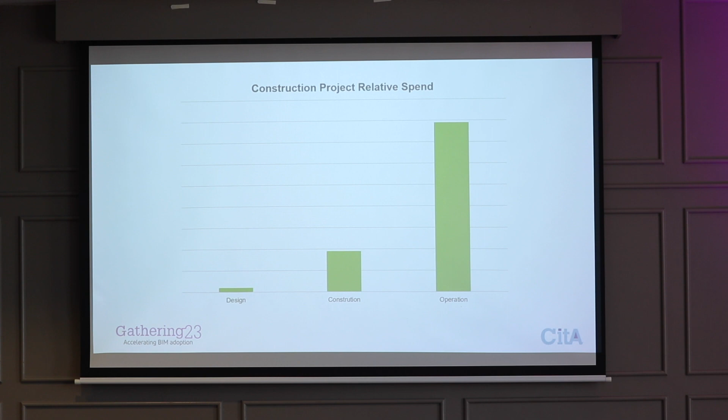I think we all know design is a very small part of the overall construction project, which is a very small part of the overall operation. I think the point I'd like to make is that if we invest in design, we can reduce that construction cost and reduce that operation. But that investment needs to be for the right thing and for the right reason.

We all know we need to make better decisions earlier on in projects. The only way we're going to do that is by making better design decisions earlier on, and having the ability and the resources, the infrastructure and the tools to get the right data at the right time, to make the right decision for the betterment of the project, to reduce construction cost, reduce waste, reduce construction operation, and reduce the carbon output of our projects.

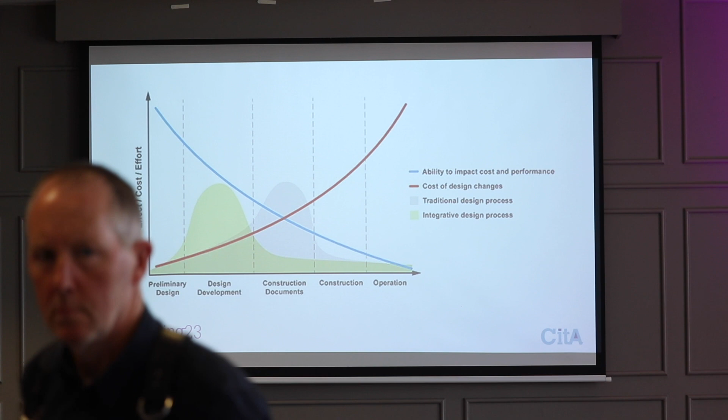It's about maybe changing our fee structures and our cash flowing to make sure we're spending the right time at the right point in projects so we can get the right decisions made.

Where we've seen this work best on projects is when there's been standards, we've agreed to the standards, and we've all worked and cooperated and communicated together. We've come together as a team, and the team has delivered project outcomes. The reverse is true - where this generally fails is when there's been a fall down in a standard, or a fall down in communication and cooperation. For me, it's about trying to get the construction industry and the operation industry and all of us together to foster a better environment and an agreed way that we can get this stuff done.

As Pat has outlined, maybe there is a way more efficient way to deliver these projects.

A term I really like in the ISO 19650 suite of documents is the level of information need. For me, it really focuses the question of why are we doing this, what's our purpose, why are we doing this project. It's not a BIM question, it's not a technology question, it's what do we need to get from this project. What can digital, what can BIM, what can all our lean processes do, and what do we need to do to meet that need?

Information being a big part of it - what do I need, what does the client need at the end of this project? If we answer that, we start from the end and work back and figure out, as a team of designers and construction professionals, what we need to deliver the client during and after the project. So a real lot of time for me spent answering this question earlier on the project will reap huge benefits to the project and its outcomes.

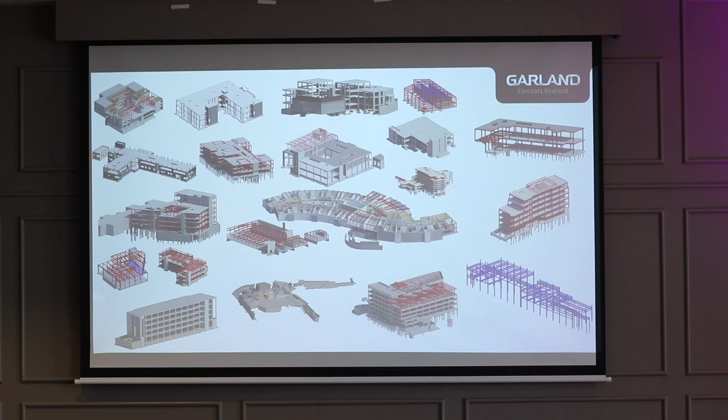It's with those connections and interoperabilities that will make things better for all of us, so that we are working smarter and leaner. We've learned an awful lot of lessons, and we've made an awful lot of mistakes. We try our best to learn from them, and I'll show you a couple of examples of how we think we've tried to make things better in our practice, and how we still haven't succeeded.

This is one of our first BIM projects. It's over 10 years old now, which is hard to believe. It was a design build contract, and I think that really helped foster the communication, cooperation, and agreement to standards that we needed to deliver our first project.

It was design build. We were working for BAM, and BAM said to us, we want to do this in BIM. There was no client requirement and no client need, but we want to do this with BIM. I think everyone went into the project and said, we don't know all these answers. As a team, as a group of professionals, we're going to figure out these answers as we go, and we'll all learn from each other and help each other. It was that environment that I think helped us learn a huge amount that we still bring to the fore on some of our current projects.

It really opened my eyes to how powerful a common data environment can be, and how powerful a naming convention can be. There's nothing better than going to a common data environment, knowing you need something, and getting it straight away, at least with a couple of clicks.

Nothing is more frustrating than going to the common data environment and not being able to find what you need, or the version you've got isn't there, and you need to start going on the phone and sending emails to find out what you need. There's a huge amount of value in having a proper common data environment working on a project. I think this project really reinforced that for us.

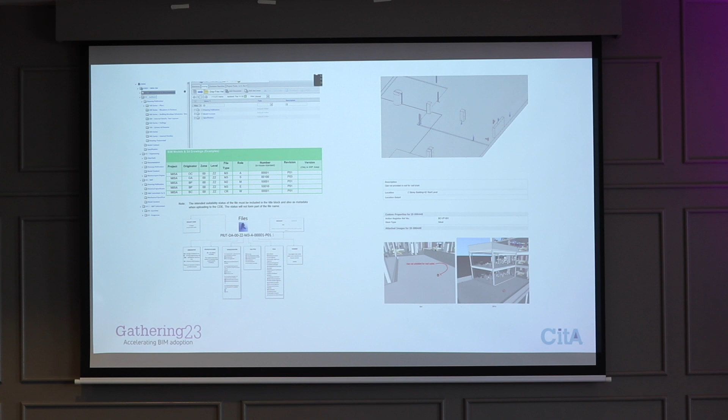Clash detection, clash avoidance, whatever you need. Again, 3D visualization 10 years ago really blew our minds for what was possible for the industry, and as Pat has shown us, what we can now deliver to our clients. You tell us your building, you tell us your bathroom, you tell us that, and we'll deliver it.

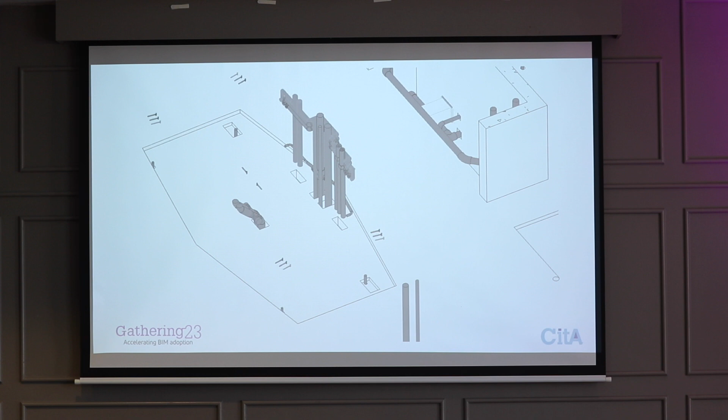Really what we instilled with this project and others is respecting the content. If we don't have the content right, things aren't going to work, and we're not going to be able to connect things.

A small example here - for those structural engineers in the room, I'll call it respect the node. We had a misalignment of the node, so the node wasn't where it was meant to be in the structural model, but it was in the physical model. That started throwing up all sorts of errors, and when you have one of these it's fine, but when your error log says 500 errors, that's off-putting immediately, and someone says, it doesn't work, the technology's not working for me, I'm going back to the way I used to do it.

So, respecting the content - I'll touch on it again. I think there's been a theme over the past morning already, and in some of the sessions I was able to witness over the last two days, in trying to keep it simple.

And the simpler we make things, the more efficient it's becoming for ourselves. Trying not to overcomplicate it, and trying to model, manufacture, and build in the most efficient and simple way possible has to be our future.

I think maybe we've gone through a peak and a trough. The theme I'm trying to pick up is that simple is best at the moment, because we tried to overcomplicate it since we have the technology to do it. But actually we need to think, what are we trying to do? What's the level of information we need? What's the outcome we need? And how can we make the technology give us that answer or that outcome?

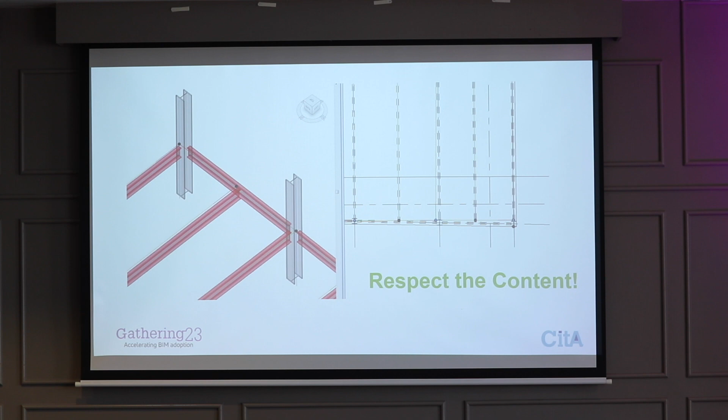I suppose that was one of our first structural projects, one of our first kind of civil projects where we tried to implement technologies. It's an economic free zone in Saudi Arabia. Like most projects in Saudi, it hasn't actually got built. They've thrown out everything and they're re-going at it again, so I'm delighted to be working on it again. That kind of rework we like, because we get the fee twice.

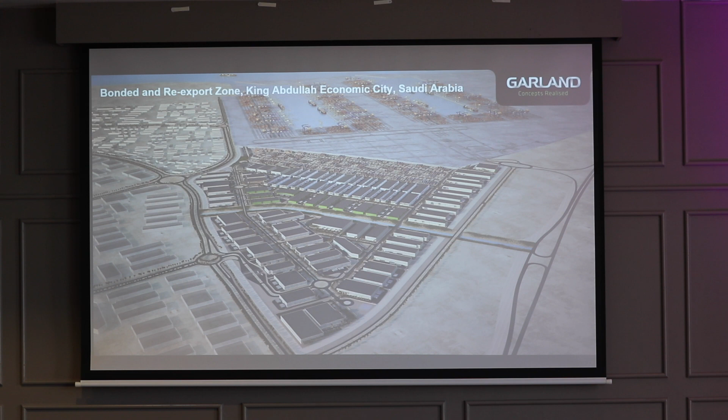What we were dealing with, it's a 320 hectare site. So although it looks simple, there was an awful lot of data and a huge amount of information. And we really learned quickly that our current processes and our original processes for trying to manage that size of site and that sort of information was just impossible, and we couldn't do it.

We needed to figure out a way that we could work with and change our processes so the information was workable and usable. So we had to come up with our own internal naming system. We learned a lot from the previous project on the structural side, trying to break down our work so we weren't loading 500 megabyte models or drawings. We were loading 3 or 4 megabyte drawings, with lots of links going on. We tried to make it as efficient as we could so people could work independently of each other. We learned an awful lot from the Civil 3D side on trying to make that project efficient for ourselves.

But then the client came along and told us, oh yeah, it's all fine, but we can't accept that file the way you have it with all those data shortcuts and XREFs. We want one AutoCAD drawing with everything blocked in and built into it. We spent an awful lot of time with the client trying to convince them of how they could work with our stuff, how the way we'd set it up would work, and they could accept our model, with object enablers and so on. We didn't win the battle.

So what happened in reality was we had a data dump every Friday. We were actually working on the design of the project Monday and Tuesday, and we spent Wednesday, Thursday, and Friday getting the delivery ready for the client. For me, that's a huge amount of waste. We were wasting the time we should have been spending on getting a better design, optimizing our design, instead of just getting a deliverable ready.

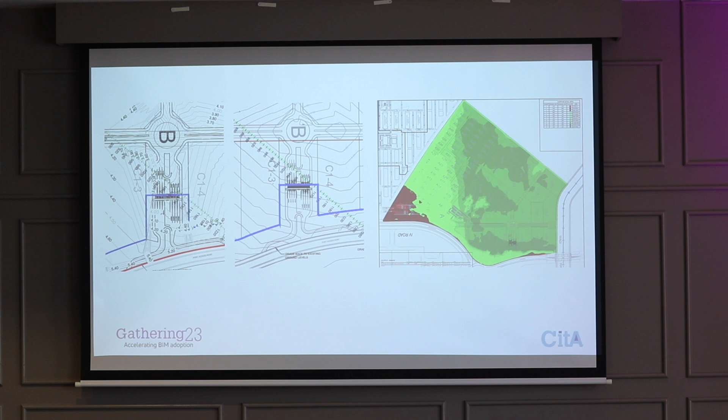And we simplified the model. And when we simplified the model, everything worked better. And we got an answer that we could trust, and we knew there wasn't errors, and that was essential for delivering for the type of client that we had.

Another type of example or discussion I hear in the office all the time is, I need a better computer. My graphics card isn't good enough. My processor isn't good enough. So we were opening up these models in Civil 3D, and again, it's a 320 hectare site, so it's a big area on an AutoCAD drawing.

And they were loading all the XREFs, loading all the data shortcuts. And it was taking 10, 15, 20 minutes for the drawing to open for someone. And my computer's broken, my computer's not working.

So eventually we said, right, put the pause button. After a few weeks of listening to this, hit the pause button. What's going on? What is it loading? And eventually we got to the bottom of it, that we had this bloated XREF, as I call it.

Our background that we were working with had actually 15 backgrounds on top of each other. They had dummy lines, loads of blocks that were loading that were not necessary. We spent a lot of time just cleaning up our background, which in hindsight sounds really simple, but when you're in the middle of the throes of it, it can really annoy you.

Cleaned it up. Instead of loading for 15 minutes, it was loading for 3 minutes. And the file size went from 100 megabytes down to 5. And you got to remember, every Friday we're giving this thing to the client 1,000 times because he wants an individual file with all the XREFs in. We were giving this client that file, and our CDE was just exploding. And then overnight, our CDE just disappeared in file size because we brought down the size of this file.

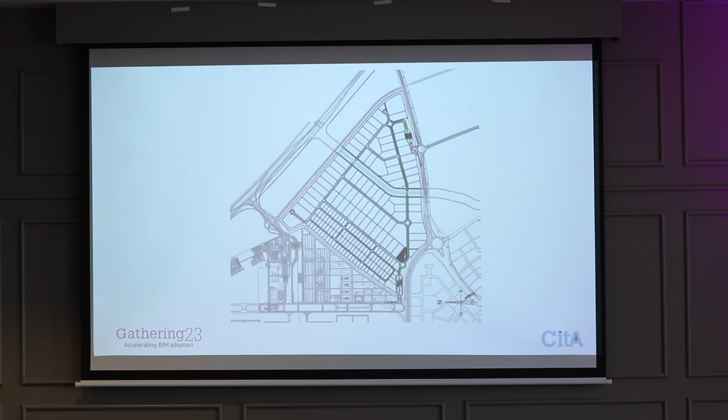But again, just the waste of the data storage, the waste of the minutes of loading, they're the things we just need to work on. And it does take us at least a minute to hang on. There has to be a better way. There's something wrong. Let's go and find it and fix it.

And the other thing to remember as well is, as a practice, we deliver big projects in history over time. We've done it consistently. Shannon Industrial Estate was a 500-hectare development, 50 kilometres of road. We did it manually, drawing by hand on drawing boards. Thankfully, I wasn't there for that one.

But the way we were able to do it was because we kept it simple. We had some simple rules. There were areas of, this is where the sewers are going on the road, this is where the ducts are going on the road, this is going on the footpath. We didn't need to clash detect. And again, there are things that we learned in our bonded zone project where we said, right, if we do this and we keep these simple rules, we only need to clash detect these 4 or 5 things.

We don't need to model a 320 hectare site. We just model these 5 areas in 3D, because if there's going to be a clash, that's where it's going to be. Same with Raheen, 180 hectares. We were able to deliver these projects in the past without technology, so the challenge now is figuring out how to use technology to deliver them more efficiently, without overcomplicating things.

So what's my message? There's always a better way, usually. And I always think of my friend on the typewriter. Keeping it simple, stupid, is a motto I have throughout our office and organization. If we're not keeping it simple, we're losing.

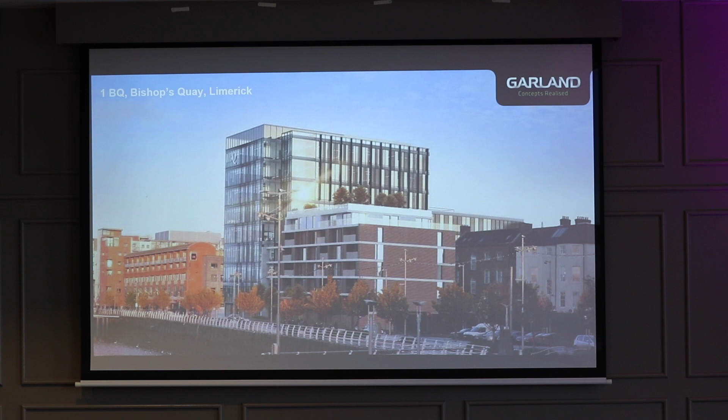We've tried to apply this on our ongoing projects. Sometimes we succeed, sometimes we don't. One project on the screen - I won't name it, I might get in trouble - we were being screamed at for RC schedules, reinforced concrete bar bending schedules for the building. Screamed at, and screamed at: we need them, we need them, we need them.

Then 3 weeks later, the person requesting it turned around and said, actually, we're going to prefabricate all the reinforcement - this fellow here is going to prefabricate it all in the office - and they want this, this, and this instead. They're throwing out your schedules. So we spent 5 weeks delivering these RC schedules and they were dumped in the bin. Not only that, we had to change the way we did it to suit someone else's methodology. To me, that's as much waste as the bricks in the skip, and I think that's where we need to focus as well.

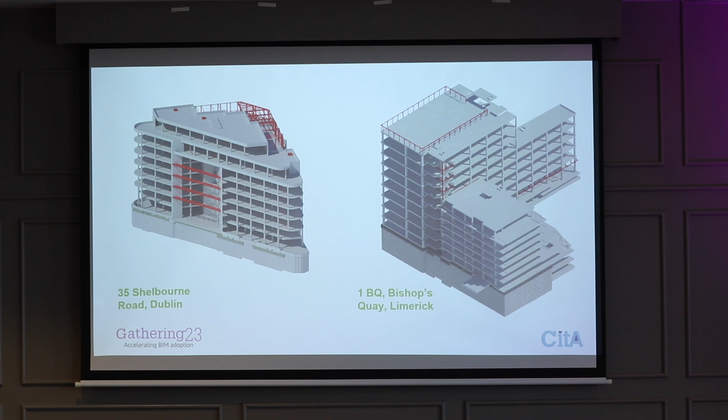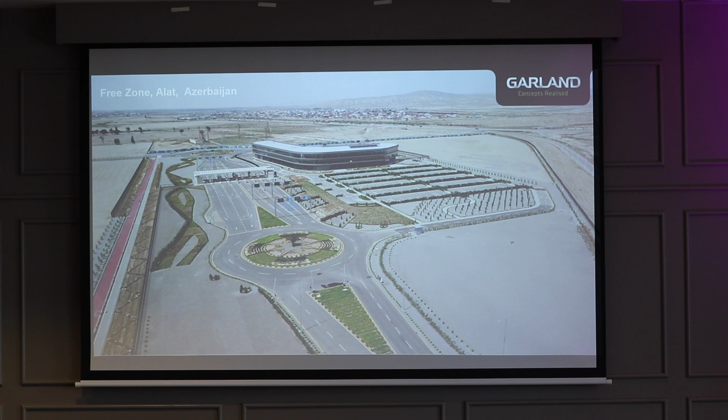Again, the learnings we had from the bonded zone, we were able to bring to a project in Azerbaijan. Did we make mistakes? Did we learn lessons? We're still learning them, we're still making them, but I think we're getting there. From that, we were actually asked to write a roadmap for the implementation of BIM in Azerbaijan. I can't leave it on the screen too long because they haven't published it yet - hopefully we get there soon, because we'll need to rework it with the dates if they don't move quick enough.

Getting back to the theme of connecting things - we're trying to look internally at how we set ourselves up, because we're going to be faced with challenges. There's one job where we were asked to design a feature stairs for a fit-out project. I spent more time dealing with 2 different CDEs and a 3rd inspection plan - training, uploading, re-revisioning for those - than I did actually designing the steel for the feature stairs. I think maybe we've lost sight of what the purpose of what we're trying to do is, and that's really important.

I think Pat has kind of hinted at AI and what our future is, and we've got to set this thing up so it helps us and makes us more efficient and work better. I was doing a presentation for the ACEI one day, and this was on the lift on the way up to it: automation does not need to be our enemy. Machines can make life easier for men and women, if men and women do not let machines dominate them.

The AI isn't going to do it for us. We're going to have to get this stuff prepped and ready for the AI to be able to kick in and help us deliver our jobs, to avoid rework and to avoid loss and waste of time. Thanks.